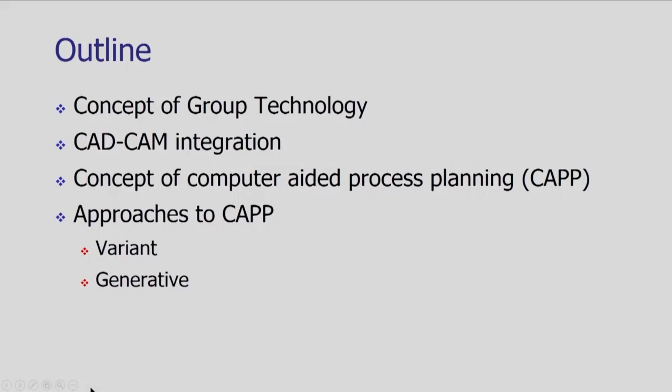Hello everyone, I welcome you all to the last week of the course Automation in Manufacturing. At the start of this week, we will be studying computer-aided manufacturing and the philosophy of computer-aided process planning. The outline of this course is in front of you. At the start of the lecture, we will see the concept of group technology.

What is the meaning of CAD-CAM integration? Why is it essential to have the integration of CAD and CAM? We will see the concept of computer-aided process planning. There are various approaches to CAPP, that is computer-aided process planning, and these approaches are the variant approach and the generative approach. So we will see their concepts and some examples.

Well, if you start looking at the variety of types of production which are carried out in an industry or an enterprise, we can divide these types of production into basically three categories or three groups. To understand this, let us take the product variety along the x-axis and the production operations volume, the volume of production, along the y-axis.

When we plot this curve, if the product variety is very less, for example the cement manufacturing company or sugar manufacturing company or any type of process manufacturing company, when the product variety is very less but the volume of production is tremendously high, and there is continuous production of that commodity or product, this type of production is called mass production. So the characteristic of mass production is product variety is low and production volume is very high.

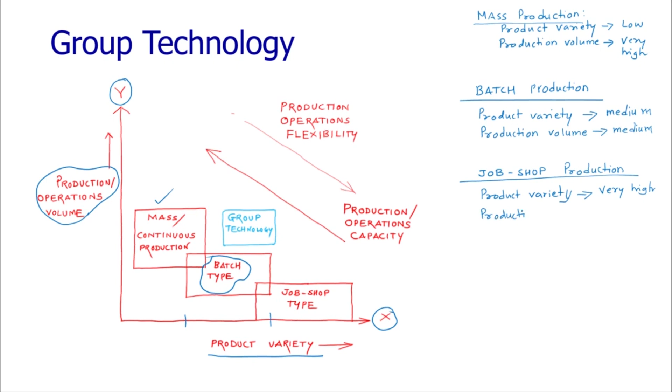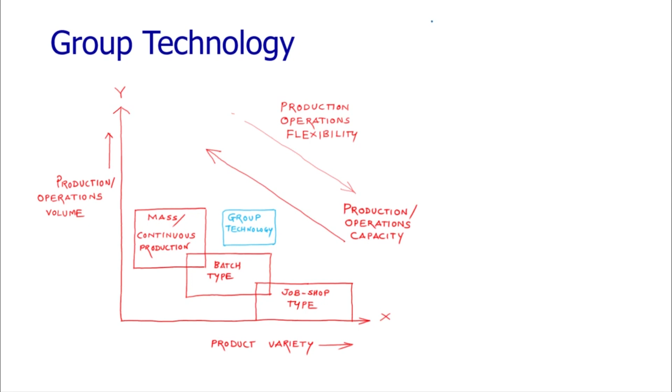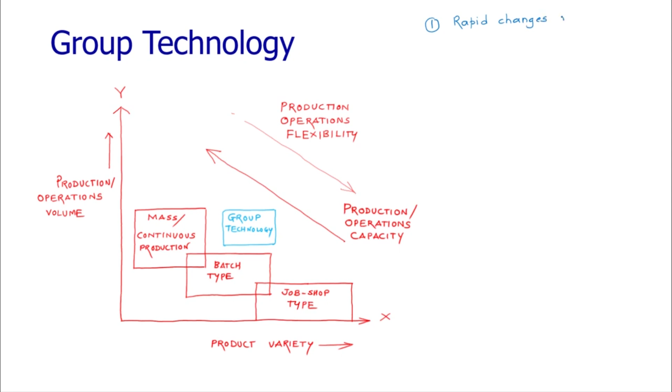Now, if you look at the present manufacturing scenario, you will find two different cases. The first case is rapid changes in customer demands. So that is leading to low product life cycle. When the product life cycle is low, we cannot manufacture the products in bulk. We cannot manufacture them and just store in the warehouse, because we do not know whether there would be consumption of the entire products we manufactured. We have to take the decision based upon the demand in the market. So accordingly, when customer demands are rapidly changing, we have to respond to that, and that's why we are studying this automation in manufacturing course, or the mechatronics related course.

Well, to cater to or satisfy the changing customer demands, we need to be ready. For that purpose, we are acquiring, or most companies are following the batch type of production. They are getting equipped with their factory layout for batch type production so that they can cater to customer demands with medium volume range and medium variety range production type. So in general, today's manufacturing industry is following the principles of batch type of production.

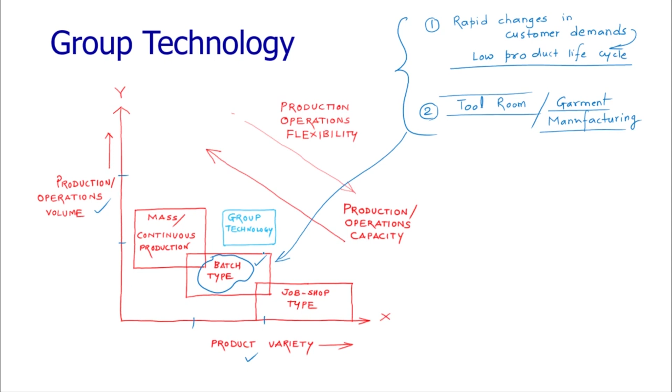Group technology is a philosophy which takes care of the needs of batch type production. It is helping to have efficient batch type production. Let us look at the formal definition of group technology in our coming slides.

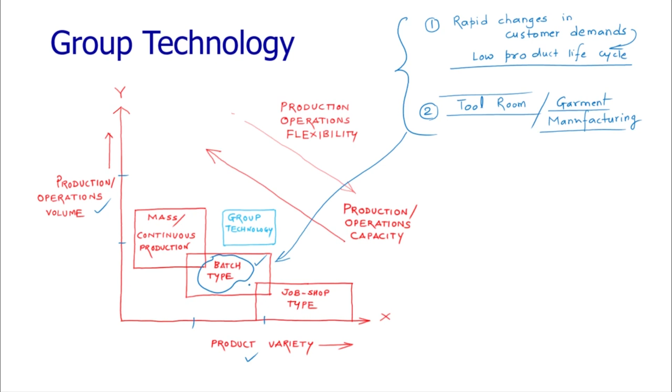Group technology is a manufacturing philosophy which is employed in the industry to improve productivity. The entire exercise's objective is to improve productivity and efficiency of the enterprise. In the objective of this course as well, till now we have seen this over 11 weeks, the technology we are trying to utilize to improve productivity and efficiency. So how does group technology help improve productivity?

Here we are grouping the parts and products which have similar characteristics. This is a manufacturing philosophy, and as the name suggests, we are grouping the parts or products with similar characteristics. What kind of similarity are we following? We are following similarity in terms of geometry, geometrical attributes, and second, manufacturing process related attributes.

Every product has to go through a sequence of certain manufacturing operations. Based upon that sequence, based upon the variety of operations which we are carrying out, we can group the parts together.

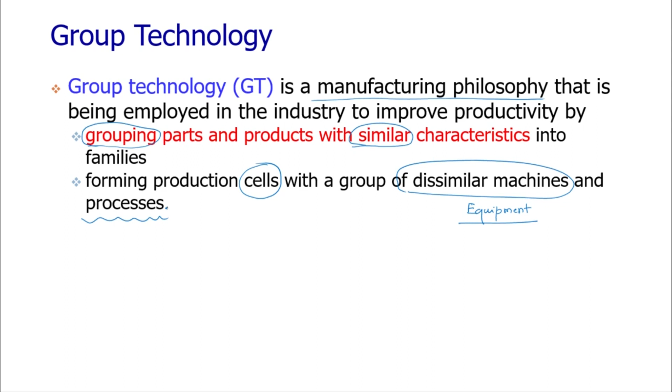Afterwards, we are forming cells. Cells of what? We are forming cells of dissimilar machines and processes together. So to cater to the needs of the part family, to cater to the needs of that particular group, we are grouping dissimilar machines, equipment, or manufacturing processes together so that operations would be easy and efficient.

Thus, I can formally define group technology as grouping of parts into families based on their attributes, and these attributes are the geometry attributes and the manufacturing process related attributes.

Geometrical classification would be done based upon the size of the product or part and its shape. Based on size and shape, we are classifying the products or parts, and that is the geometric classification.

As far as manufacturing classification is concerned, we are classifying the products based upon the type, the sequence, and the number of operations needed to manufacture a product.

The type of operation is basically determined by the method of processing. For example, some products are manufactured using casting, some using sheet metals, some using welding operations, some are wooden products where we need to remove material, that is a machining operation.

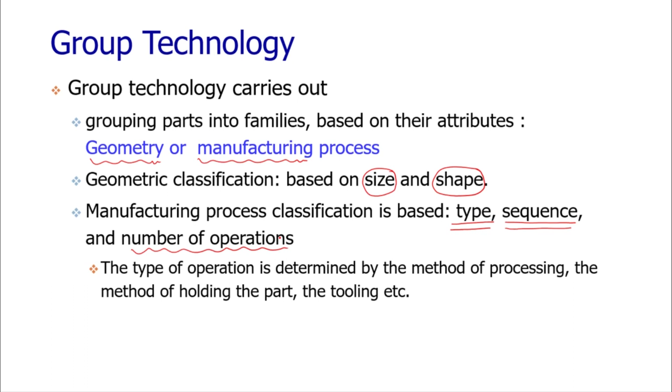Then the holding method, what kind of holding method or fixtures we are going to utilize during manufacturing, and the type of tooling being utilized to produce that particular part. So based upon the manufacturing similarity, we are also grouping the products together, and that is group technology based upon the manufacturing attributes.

When we have a number of products in enterprises, let us consider an automobile manufacturing company that designs an automobile and needs to manufacture it. First the management will analyze how many parts are to be developed in-house and how many parts can be outsourced, how many parts we can get done from vendors. Still, the number of parts to be manufactured in-house would be very large.

Then the question comes, how to group them together? Fundamentally, the very basic process is manual visual inspection. A team of experts, a team of engineers, knowledgeable people in the company, sit together and observe all the components, and based upon visual inspection, they take the decision and group the components together. That is the human intelligence they are applying.

The second process is production flow analysis, and we'll be seeing the production flow analysis. The third is classification and coding. We have to classify the components and then code them, and that coding would be done with computers, and the computers store the data, and with online monitoring and all sorts of instrumentation which we studied in this course, can be utilized to track the products, guide them during operation, and pass information at variety of places during operation. So manual visual inspection, production flow analysis, and classification and coding, these are how part families can be formed.

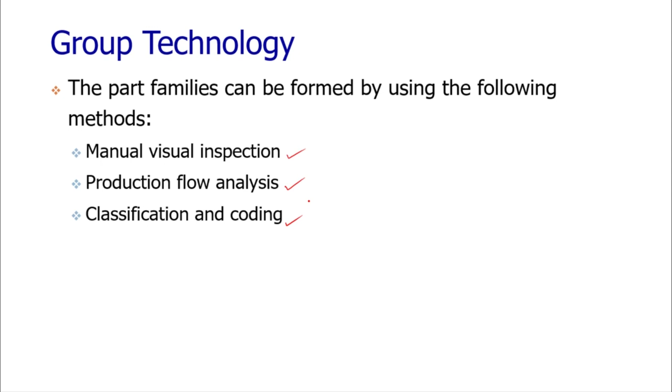So let us look at the first method, that is the manual visual inspection method. Basically, we are making groups, we are making sets by visually inspecting the physical characteristics and physical attributes of the part.

To understand the process, let us look at a number of products in front of you. If you closely observe these products, you will find that some are axis symmetric about this axis, and some parts are prismatic products.

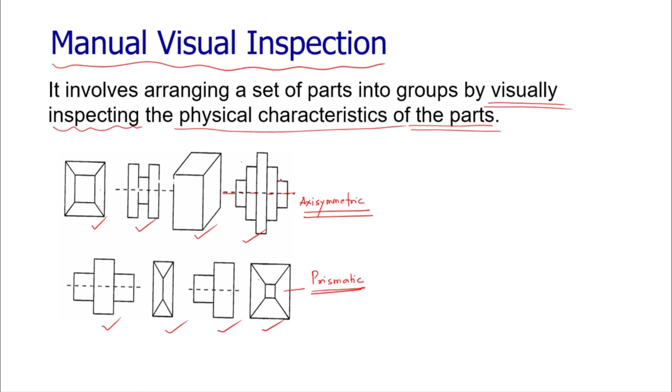I apply my knowledge and understanding of the parts based upon engineering principles. I can group these components into separate teams or cells. Here we have grouped the prismatic parts and the axisymmetric parts. To manufacture the axisymmetric parts, the basic operation is turning, plus finishing would be useful to generate these parts.

And to manufacture these parts, we can go for the milling operation or the shaping operation, which generate the flat surfaces. In addition to that, we have to go for the finishing operation as well.

So in this way, looking at the components, the team will sort and group the components based upon their physical shapes, and that will help. But this would be very difficult when the number of parts is in thousands. Many times there may be confusion and ambiguity - parts may look similar but may not be manufactured using the same sequence. In this situation, the team will thoroughly analyze and take the decision based on that.

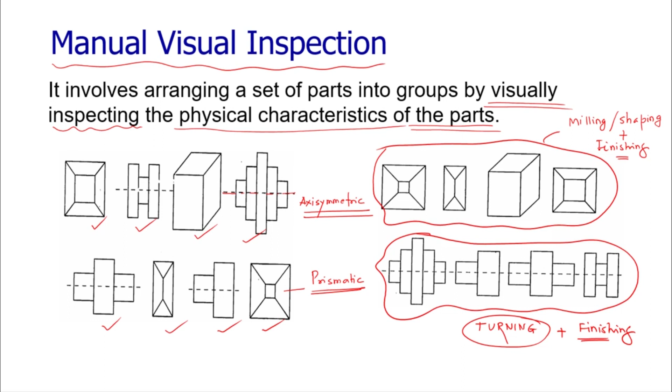The next method to form groups based upon group technology philosophy is production flow analysis. In this method, we work on the manufacturing operations and manufacturing attributes of the products, and based upon analysis of these attributes and their flow during manufacturing, we group the products together.

Based upon this information, we can generate cells, we can form the cells, maybe virtual cells or physical cells. Cells are nothing but groups of dissimilar machines. So let us see how this production flow analysis works.

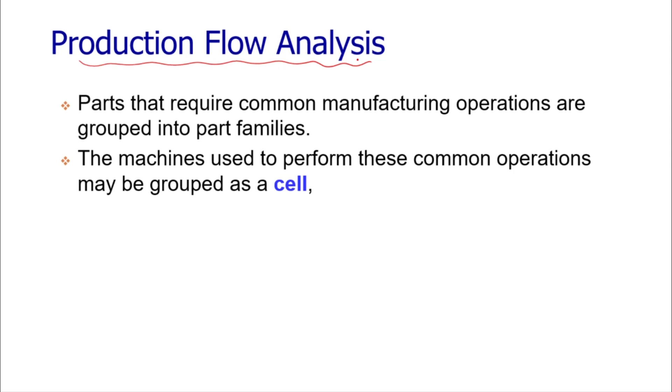Now consider a case where we are having a large number of products. On your screen you can see a modest number, that is 19, but in actual practice the number of parts may be in hundreds or thousands. There are 19 parts and a certain number of machine tools available in that enterprise or tool room.

Now these parts are being manufactured and processed on these machines. It's not essential that all parts are manufactured on each and every machine, but more or less the entire group of machines is utilized to generate these parts.

The task in front of us is to group these machines and the parts together so that we can easily handle and manage the operations. We should be able to group the parts together so that we can maintain their database and follow their production operations carefully to get the required product quality and accuracy. We can manage the dissimilar machine tools, and by grouping them together we can save energy, time and resources in material handling. For that purpose, the production flow analysis method is helpful.

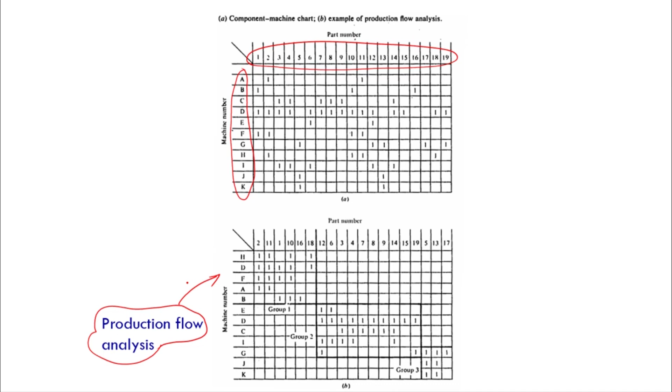After carrying out this activity we get the matrix in front of you. Let us look at the matrix. Here you can see the part numbers, the order is now being changed - instead of having 1 to 19, now there is a mixed number of parts in a column, and the order of the machine numbers is also changed.

So instead of having the chronological order from A to K, now we have a random order of the machines. And if you closely look at the allocation of the machines to the parts, it gives us certain indications. You can see certain clusters being formed. If you closely look at the allocation, we can easily detect and make out the clusters. Based upon these clusters we can form the groups. These three groups can easily be found by looking at this particular matrix.

So this is nothing but group technology based upon production flow analysis. But now the question is how to carry out this clustering, how to get these kinds of clusters. Manually it is fine, but when the number of components is in hundreds and the number of machines is in tens, the problem becomes quite complicated.

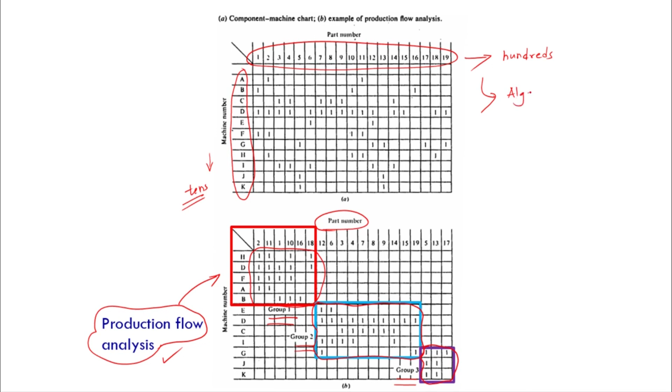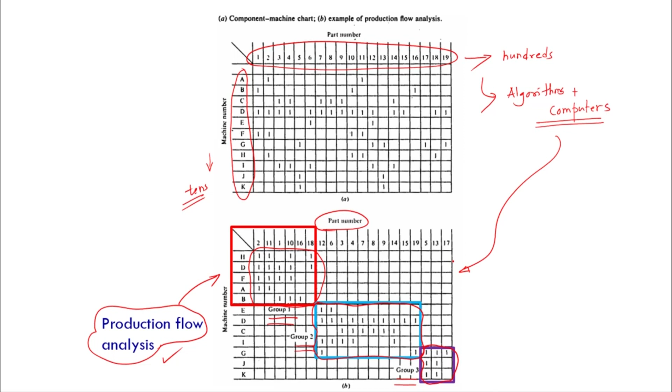So for that purpose we have to take help of certain algorithms. These algorithms can be implemented with the help of computers, and the computers may give us these kinds of solutions. So let us look at the first algorithm, the rank order clustering algorithm. It is a very simple algorithm, basically used to form machine-part groups.

Let us look at the various steps of this algorithm. The first step is assigning the binary weight and computing the decimal weight for each row. We have various rows of allocations. For the first matrix, we assign the binary weight to the rows, and based upon that we compute the decimal weight. We'll see how exactly the binary weights are assigned and how we compute the decimal weight.

The next step is to rank the rows in order of decreasing decimal weight values. After getting the decimal weight values, we rank the rows based upon the order of decreasing decimal weight value, and then reorder these rows according to their decimal weight in decreasing order.

Step number 3 is to repeat steps 1 and 2, but now for columns instead of rows. We repeat step 1 and 2 for columns as step number 3. We continue repeating steps 1, 2 and 3 until we reach a situation where there is no change in the position of each element in the row and column — a standstill position with no alteration in the row and column allocations.

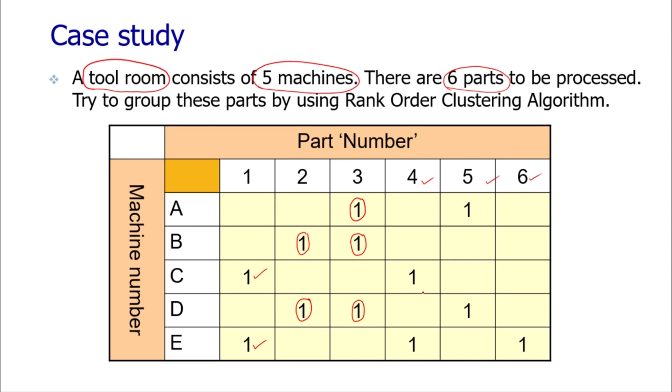Now we need to cluster them — cluster the parts together and cluster the machines together — so that the management of the part data would be easy and material handling in a cell would be easier for us.

So as the rank order clustering algorithm says, we have to assign binary weights for the rows. To do this, we add one more row, the binary weight row, and we give the binary weights from right to left. Notice that the extreme right position is 2 raised to 0, then 2 raised to 1, 2 raised to 2, 2 raised to 3, and so on.

Now let us try to find out the decimal equivalent of each and every row. To find out the decimal equivalent, let us take the first row and find out the cells which are allocated, which are having the value 1. As we have seen, machine A is processing only part 3 and part 5. So we have to give the decimal equivalent based upon the binary weight of the location of that machine, where the machining would be done for those products.

As we can notice here, machine A is not processing part 1, it's not processing part 2, it's not processing part 4, and it is not processing part 6 as well.

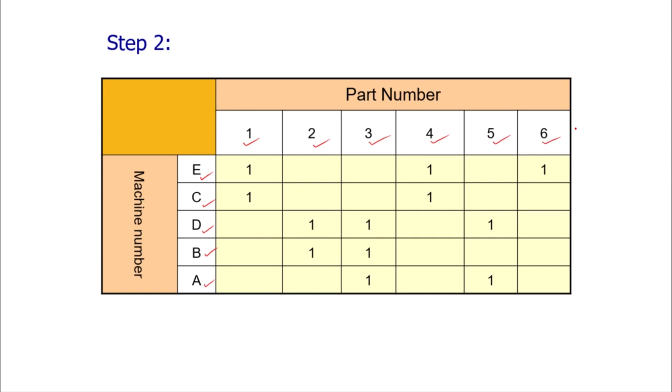Let us look at the table once again. Now we got the allocations as you can see on your screen. So 1 1 1 1 here, this 1 1 for part number 4 on EC. So there is some sort of clustering, some dynamics going to happen here. There are rearrangements, and let us see what the outcome of this is.

So binary weights are arranged. Now you notice that for the columns, the binary weights are allocated from bottom to top. For rows, we started from right to left; for columns, we are starting from bottom to top. It is to be noted here: 2 raised to 0, 2 raised to 1, 2 raised to 2, and so on and so forth. The binary weights have been given over here.

Now we need to repeat the same process that we carried out in step 2. For part number 1, let us compute the decimal equivalent: 2 raised to 4 plus 2 raised to 3, which comes to 24. For part number 2, we are getting 6. For part number 3, we are getting 7. For part number 4, 24. Part number 5 is 5, and for part number 6 is 16, that is 2 raised to 4 only, so this gives only the value 16.

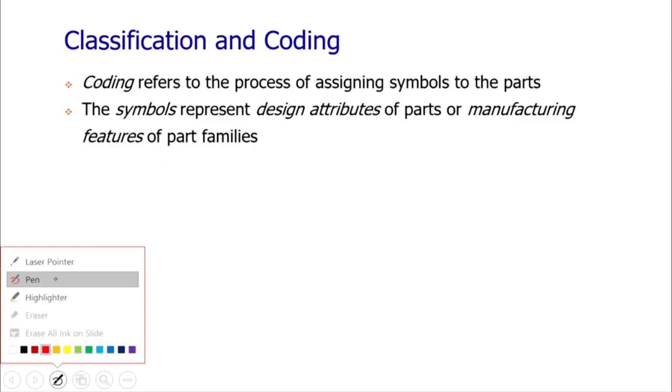The next method of GT based classification is based upon coding itself. Coding in general refers to the process of assigning symbols to the parts, and those symbols are nothing but their design attributes or manufacturing attributes, manufacturing features of that part family. So we have to prepare certain symbols, which would be easy for coding, and would also help us have an efficient computer based program, an efficient computer based algorithm.

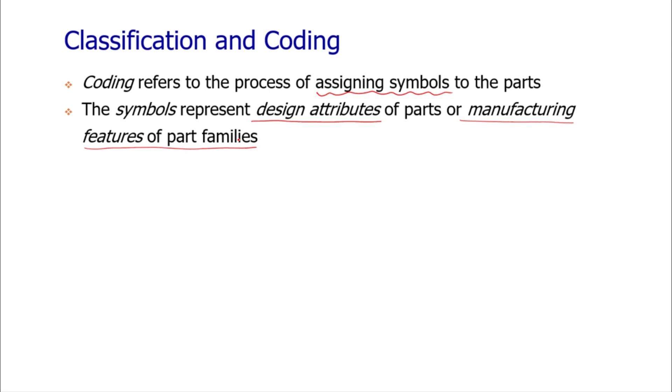If you look at classification and coding systems, you will find hundreds of algorithms, hundreds of methods available in the literature and in industry practice. However, if we try to group all of these classification and coding systems together, we can classify them into three groups: monocode or hierarchical code system, polycode or attribute code system, and the third one is the hybrid or mixed code system.

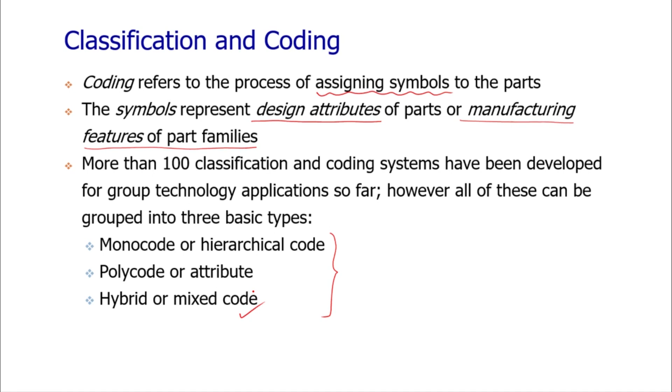Let us look at these basic types one by one. In the monocode type of system, we are giving certain codes to the product, and the meaning of each character of that code is dependent upon the meaning of its previous character. So consider we give a certain code, say C4D1X3. The meaning of 4 is dependent upon C, the meaning of the next character is dependent upon 4, and so on and so forth. That is called the monocode system.

Thus, each character is amplifying the information about the previous character. Each character in succession reveals the information of its previous character. Basically these types of systems provide information in terms of a tree structure. How this tree structure is developed, we will see with an example.

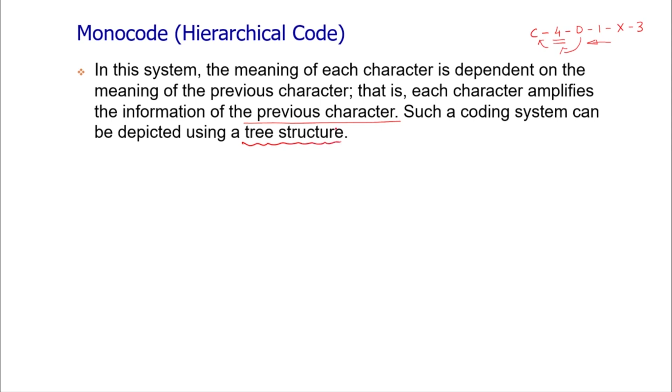To understand the monocode or hierarchical code, let us take a spur gear, a component which is there in front of you. Spur gears are generally used for power transmission or motion transmission.

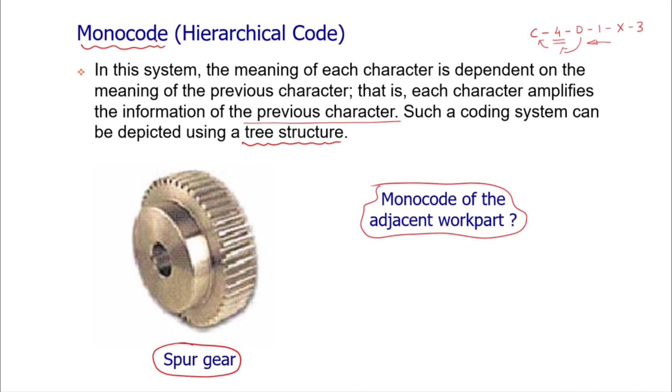Now let us find out the monocode for this particular work part. Consider the company is going to manufacture a variety of such spur gears, and for that they have developed a certain methodology which follows the monocode type of system. So to apply the monocode type of system, the hierarchical code for the spur gear family has been developed, and that is there on your screen.

So let us consider any part of that part family, and once the part comes to the decision making team, it may be a team comprising of human beings or it may be a computer algorithm. The part has come, now we have to assign the code for that. So the first information would be carried out here, that if the part is rotational, then we are giving the code A. If the part is not rotational, the code is B.

Now as it is mentioned that the next character of the code, or the second character, is revealing the information of the first character of the code. Now if the part is rotational, then the next question comes whether it is round with deviation or round without deviation. If it is with deviation, the code 1 is to be given. If it is not, code 2 is to be given.

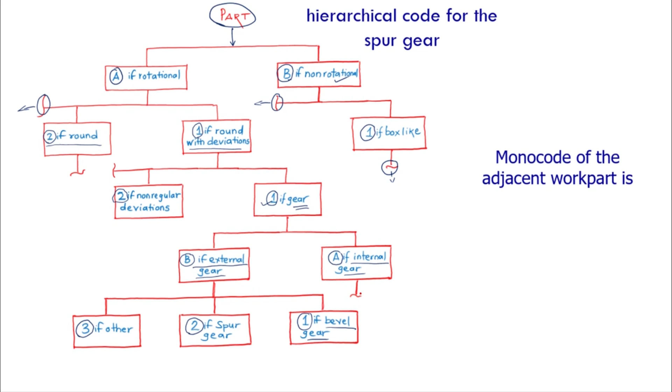For the spur gear purpose, let us solve the coding problem. The part is there in front of you. The part is rotational, so we are choosing A. Part is starting with A, so first character is A. As it is A, then we have to ask the next question whether it is round with deviations or round without deviations. So the part is having deviations, so let us have A1.

If the part is gear, or it is having nonregular deviations, certainly the spur gear is a gear. So one more character, that is 1, has been put, so A11. Then the next question: whether it is internal gear or external gear. So certainly it is the external gear, so we are adding the letter B as the next code. And now the external gear of which type, whether it is bevel gear or spur gear. So it is the spur gear, 2. A11B2 is the monocode for the work part which is in front of you.

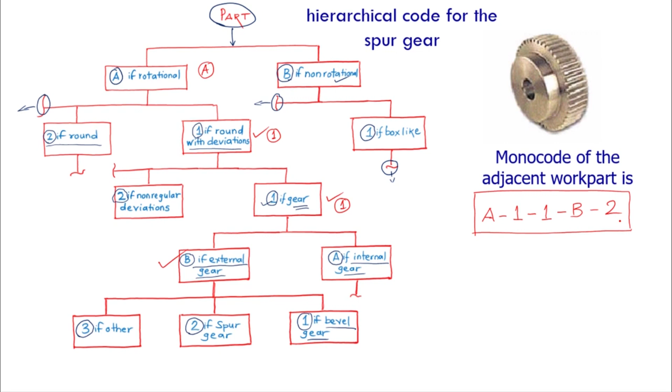In polycode, or attribute code type of system, the code symbols are independent of each other. In monocode, we have seen that the code symbols are dependent on each other, the second digit is revealing the information of its previous digit. But in this case, each and every symbol is independent, it is not dependent upon its previous code or digit. So each digit in its specific location of the code is describing a unique property of the workpiece. That unique property may be the geometric attribute of the work part, or it may be the manufacturing attribute of the work part.

Polycodes are finding useful when we want to reveal or provide manufacturing process related information to the user. But the polycodes have a drawback that the length of the polycode may be excessively long. So when more information or more type of attributes are to be incorporated in the code, the length may be excessively long.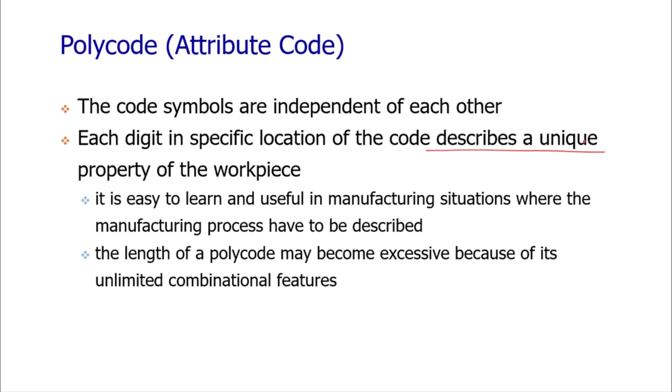Handling such long codes would be difficult. So let us find out how to define a polycode of a typical product. To understand the concept, let us take the example of the same spur gear that we have seen for the monocode. A typical chart for the polycode or attribute code can be seen on your screen, where we make a table having a variety of information written against the digits.

The first column is the digit column, and each digit has its specific meaning. Digit 1 is explaining the class of feature as the external shape. 2 is providing information about the internal shape. 3 is about the number of holes. 4 is the type of hole, and so on, and the gear teeth. And then there are possible values of the digit.

So for the first digit, what are the possible values? If it is cylindrical without deviation, then digit number 1. Cylindrical with deviation, then digit number 2. And box-like is digit number 3. So when we give the value of 2 at the first digit, that means the part is cylindrical with deviation.

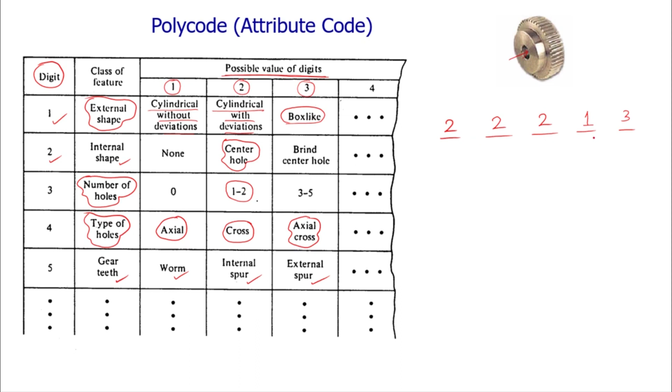Now the last digit, that is the gear teeth - what type of gear teeth are there, whether it's a worm, internal spur, or external spur. It is certainly the external spur, so the attribute value is 3. The code for the spur gear as per the polycode or attribute code methodology is 22213.

It is more compact than the monocode, and it's very easy to understand the meaning of each code because the digits are not dependent on the previous one. If somebody asks what the meaning of the fifth digit is - what type of gear teeth - it is certainly 3, meaning external spur type of gear. And how many holes are there? The third digit gives information that the number of holes is between 1 to 2. So in this way we can retrieve information from the polycode comparatively easily.

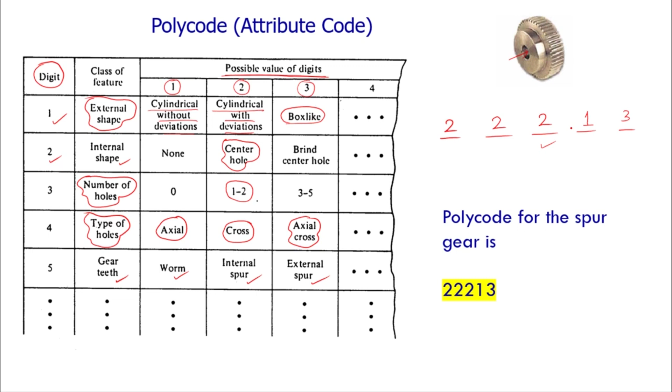But when the number of attributes is more, when more information is to be incorporated, the length of the code would be excessive. That will consume a lot of space inside the computers and slow down the processing of data. In reality, in the industry, most coding systems are based upon the hybrid code, getting the benefits and utilizing the advantages of both the monocode and polycode methodology.

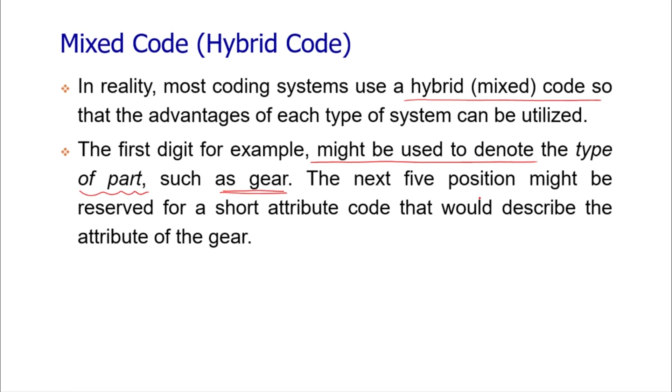So the first digit of the code might be denoting the type of the part. How can the hybridization be done? The first digit denotes the type of part, such as it being a gear, and the next 5 positions might be reserved for the short attribute code that would describe the attributes of the gear - its geometric shape and geometric features basically.